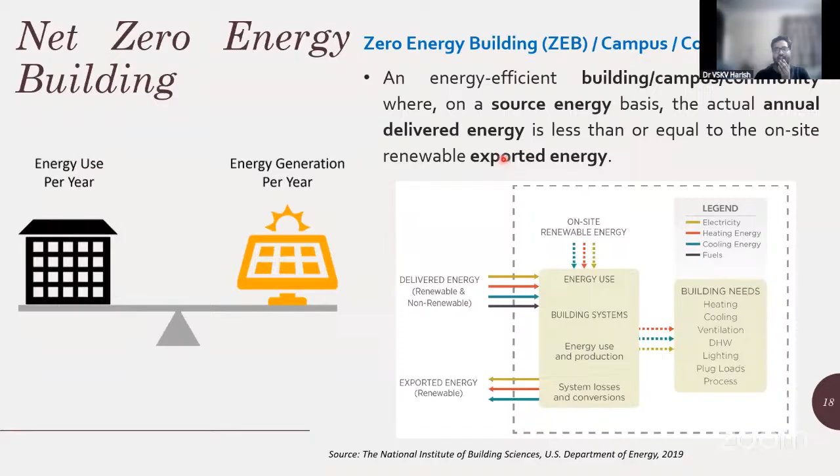If you are using diesel generator sets, small gas-based turbine power plants or whatever it is, that is not your net zero energy building. So it has to be an energy efficient building.

Green building widens it. So it's not only about energy, it is about soil, environmental impact, water, pollution, air, each and every. In layman terms, optimal usage of these things: Jal, Vayu, Prithvi, Akash. Jal, water; Vayu, air for ventilation purpose; Prithvi, the soil I talked about; Akash, sky for lighting purposes. You can see that also in our Indus Valley civilization or our old constructions. In Pondicherry, we have Auroville. In Delhi, we have Lotus Temple. All of these majorly talk about this.

Now, let us talk about smart building again. The definition that I have taken is from the Oxford Dictionary and also from the IEEE magazine, where a smart building is nothing but installation and use of advanced and integrated building technology systems, which are nothing but ICT technologies, information communication technologies.

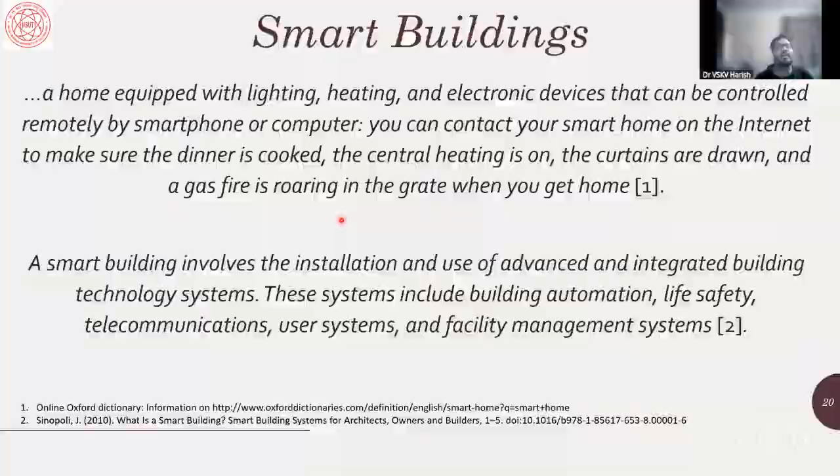So now we have understood, starting from very basic energy management, sustainable energy management, AI-based techniques, what techniques are available, the smart grid scenario, futuristic power grid scenario, modern power systems, building energy systems, net zero energy building, green building, and smart building. Now let us understand where buildings to grid integration focuses in.

Whenever we say buildings to grid integration, that means it is bi-directional flow of power and bi-directional flow of communication also. That means, as per the definition of smart grid, any appliance that you are working on, for example, I majorly work on inverter-based air conditioner systems, you may work on a smart refrigerator, someone may work on smart LED lights, all of those services or appliances can be controlled by the utility. Okay, and which is true also.

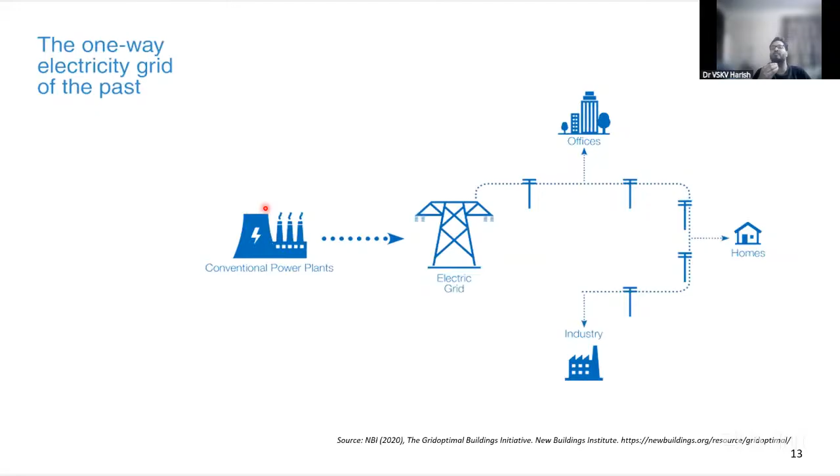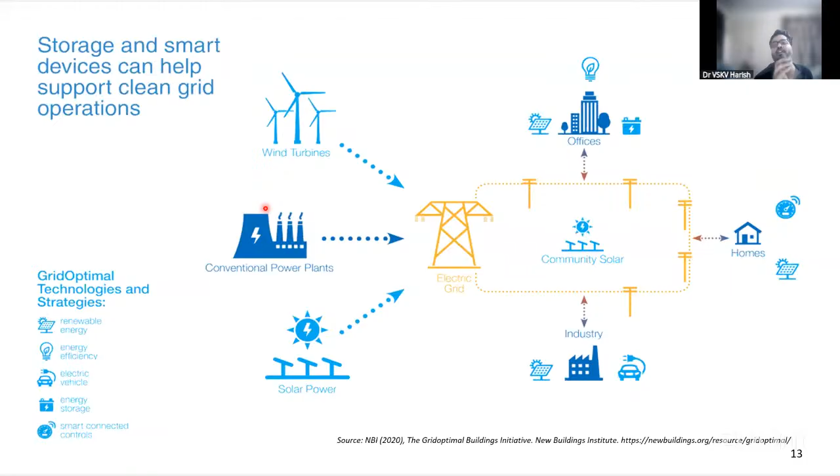I'll give you an example. I can download certain apps in my mobile through which I can switch on, switch off, and control my air conditioner system, my TV system, right? I can have an app developed and controlled by the utility, so I can integrate that feature. See how we are doing banking: we give the control to Paytm. We say, okay, I link my UPI with you and I am paying someone using mobile. In the same fashion, can you do it for control in order to regulate your frequency and voltage? That is simply the research.

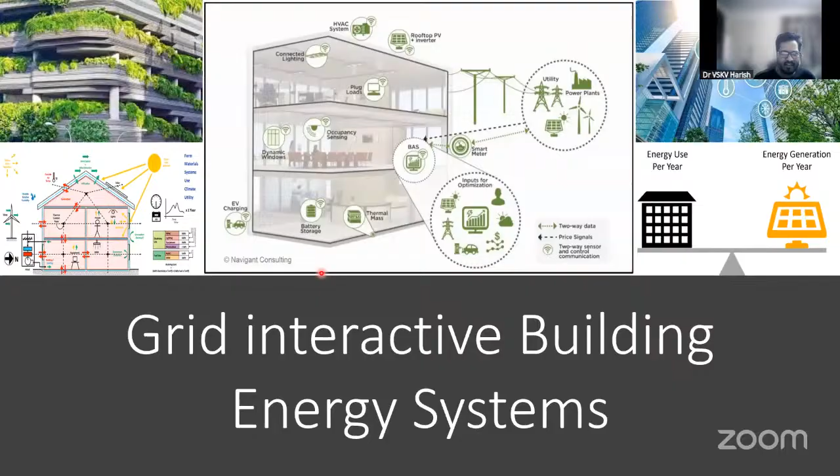This concept has already come up in a report developed by the US Department of Energy through a partnership with Navigant Consulting, where they talk about grid interactive building energy systems. This has a very technical definition: it is an energy efficient building block. This point is very, very necessary, that it is an energy efficient building with smart technologies, that is ICT based technologies, characterized by the active use of distributed energy resources, those resources which are connected at a voltage level less than 33 kV, to optimize energy usage for grid services.

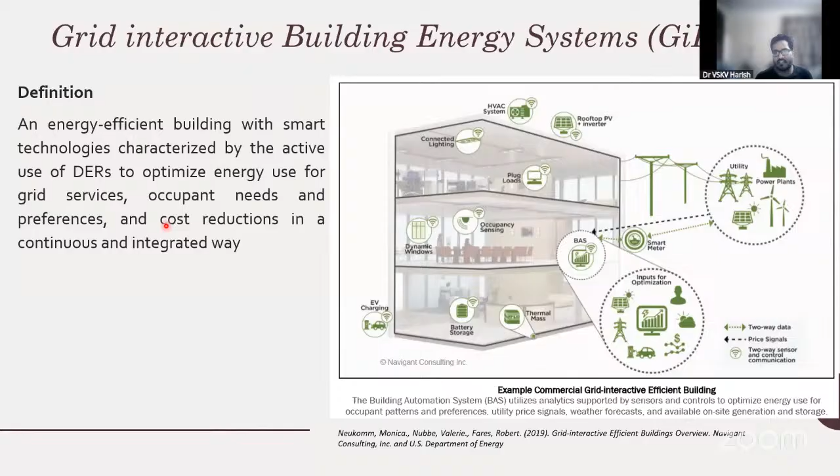Grid services means they are providing power system regulation, either frequency regulation or voltage regulation. Okay, so there is one box. One side of it is talking to the grid, another side of it is talking to us, providing us the needs: the thermal comfort, the visual comfort, the ventilation comfort, the corona-based comfort, the PM 2.5 pollution comfort. Pollution comfort means reducing that pollution. All of this happening in a cost optimal way. So cost reductions are also coming into the picture.

How do we develop it? Initially, I told you that there is no universal structure for building to grid integration because it is comparatively a novel concept. So I'm providing you the points that I consider in my study. We start with the modeling first. Three aspects. One can be white box modeling. That means you are not doing any experiments, but you are completely dependent upon mathematical equations, textbook equations, theoretical equations. Such models are very accurate, but they demand large computational power.

Then we have black box modeling. Black box means you don't know anything about the model. You just give them experimental inputs to get the experimental outputs. You do regression-based analysis to give an output-input relationship. They are very simplistic models, but heavily data-driven, and they are least accurate. Then we have gray box model, where we use theoretical equations and certain parameter values we predict using some optimization-based algorithm. I'll show you, I have an Applied Energy paper on it.

And after the modeling, we do the comfort and energy optimization because, as I told you, we are not only talking about energy management. One thing that my research is challenging is the definition of energy efficiency, net zero energy building, or smart grid. Talk about my comfort, boss. See, I'll give you an example.

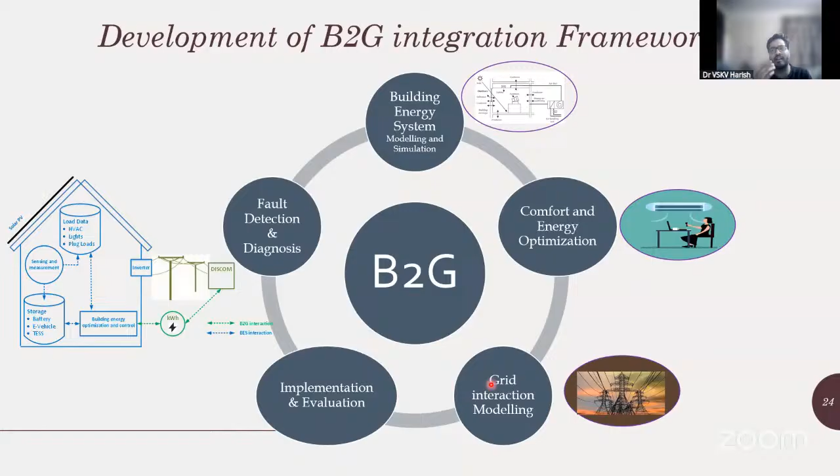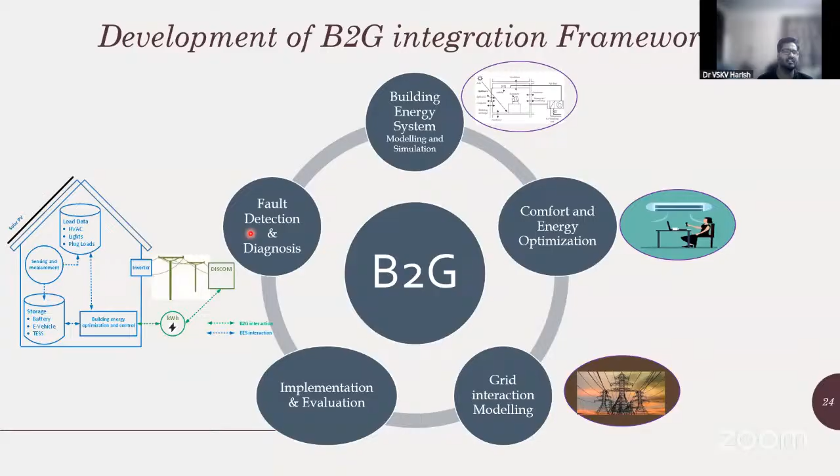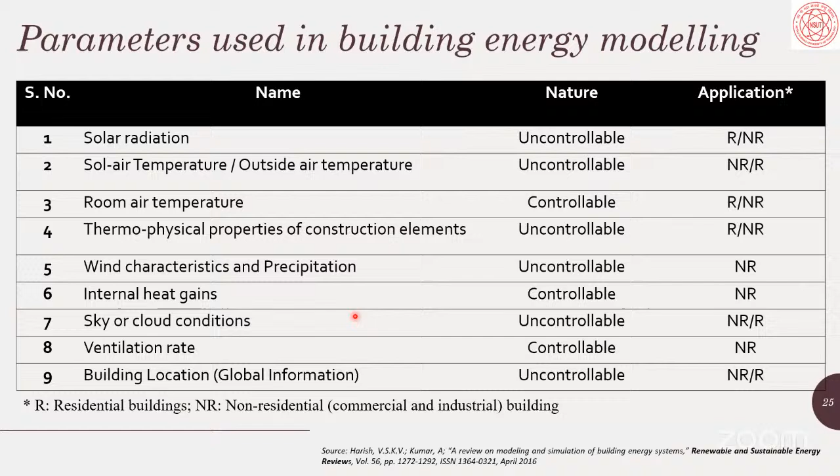That means that you can develop an algorithm for thermophysical properties. Thank you, sir. Can you tell me why, sir? Any idea? Sir, it depends on the materials which we use, like from a construction point of view. Yes, yes, yes. Very good, sir.

Thank you. Thermophysical properties of the components I have taken as uncontrollable because the control algorithm which I have developed should be universally acceptable. For example, if I develop a control algorithm which works fine for Chennai, it should work fine for Kolkata. It should work fine for a building in Mumbai as well. Thermophysical properties are majorly thermal and physical properties like thickness, thermal conductivity, resistivity of the materials which we use to build the construction. Now that data will be given to us, then only the control algorithm will work.

So the control algorithm input will be thermophysical properties. So the control algorithm will not be able to change the thermophysical properties. It will not change the input. So it will not be controllable. It is the input to the control algorithm. Hence it is uncontrollable, sir. Did you get my point, sir?

So if you see here, interestingly, solar radiation I have taken as uncontrollable, but it is controllable. Let me tell you why. Let me tell you how. If you look wherever you are sitting right now, even if you are sitting in a car and watching this, geometrically we are sitting inside a cuboid. So we have 4 walls around us. There is one roof, there is one floor. We also have doors. At the same time, we have windows.

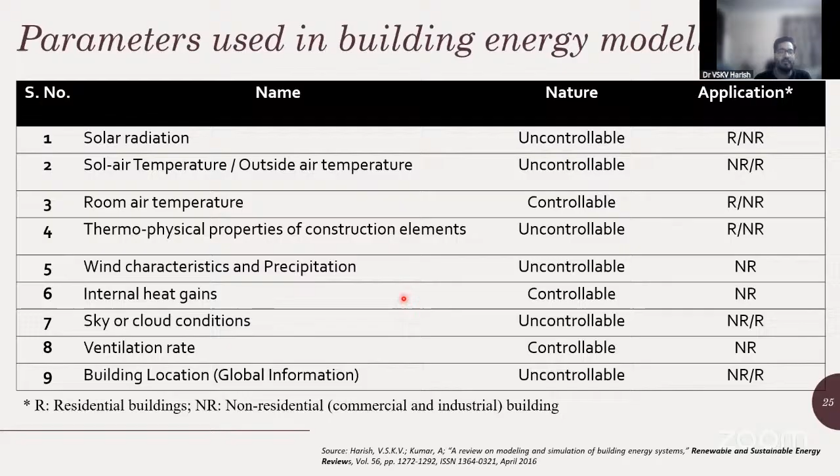So taking solar radiation as uncontrollable is a mistake, but what I'm showing you is a paper that I published in RSER in 2016. So we are now working on making this a controllable scenario, where the solar radiation will be controllable.

After developing the parameters, as sir has correctly pointed out, we make use of the thermophysical properties and develop thermal resistance and thermal capacitance. So what we are doing is developing building energy models in terms of resistance-capacitance networks. How we develop them is just like the concept of a transducer, where every physical parameter is calibrated and converted into an equivalent voltage or current signal for digitalization and for metering.

In a very similar fashion, we use the thermal-electrical analogy. As thermal energy or heat flows from a higher temperature region to a lower temperature region, in a similar fashion, electric current flows from a higher potential point to a lower potential point. So in any network, the voltage nodes become the temperature nodes and the current flow becomes the heat flow, right? That is why we make use of the thermal-electrical analogy.

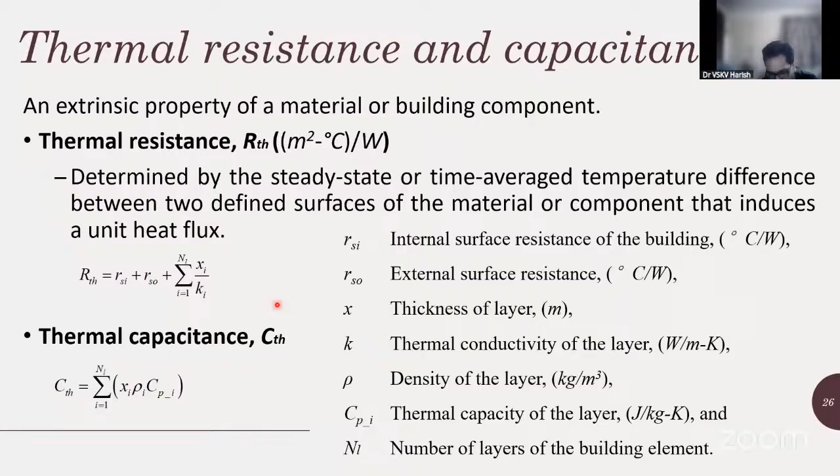One more thing where machine learning and AI based aspects are coming in is occupants comfort centric approach, or occupants comfort centric control. Can we, in a nutshell, integrate or operate an air conditioner without a remote control? That is this research aspect.

I'll give you an example. My cabin in NSUT has an air conditioner system. We are in regular service there for several years, so there will be a certain pattern of how I use my air conditioner system, switching it on or off, changing from 24 to 26, sometimes 16, using the remote control.

I told you that a mobile can also control the air conditioner system. Mobile has Bluetooth, using which it does that. If I can tap my behavioral pattern using some computer-based algorithm and make use of my mobile, since we have our mobile with us at all times, even sadly during washrooms.

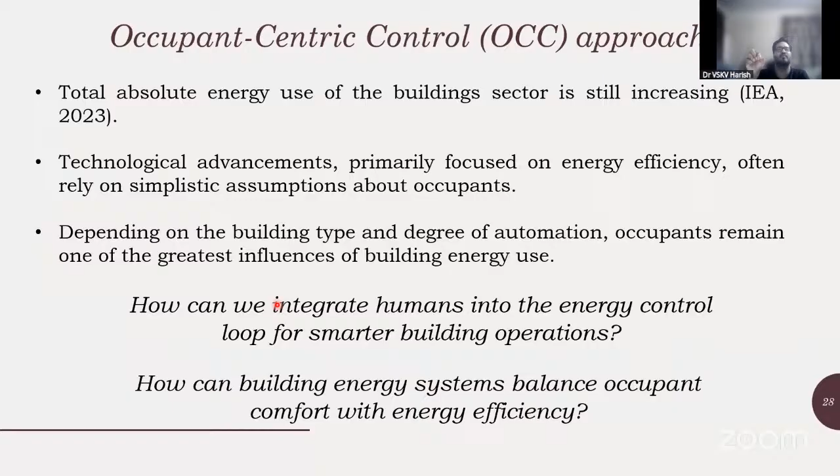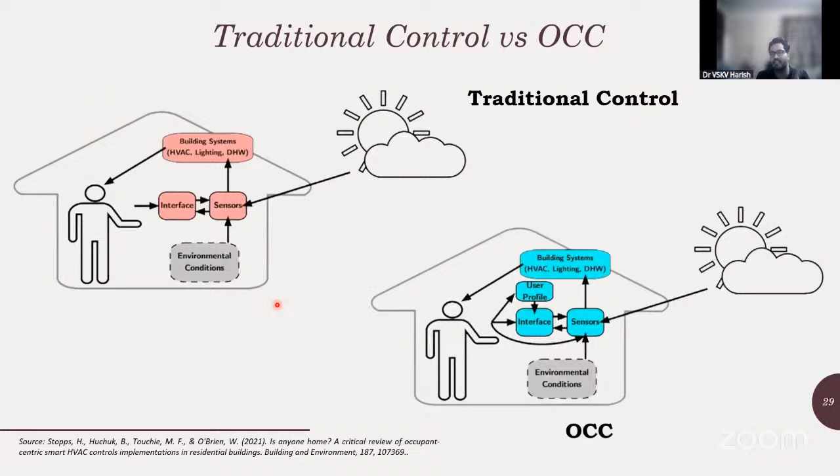That is occupants comfort centric control based building-to-grid integration, how we can integrate humans through technologies for comfort based control. That is OCC, occupants comfort centric control, which is again an AI based sustainable building energy management system, where we not only focus on occupants and building but also on IEQ, indoor environmental quality.

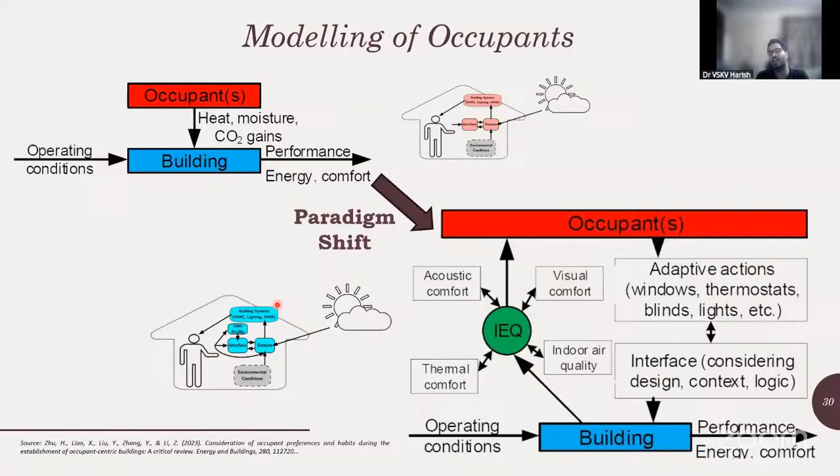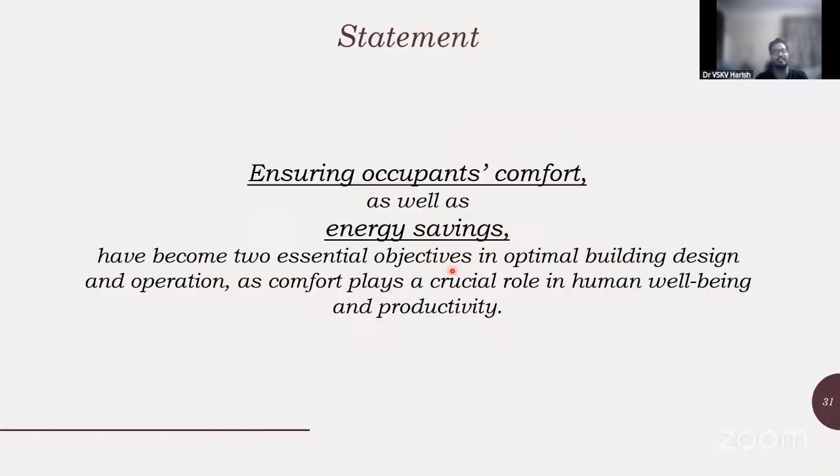IEQ is indoor environmental quality. So the problem statement through which we are doing OCC research is ensuring occupants' comfort as well as energy saving. These two become the main objectives for optimal building energy usage.

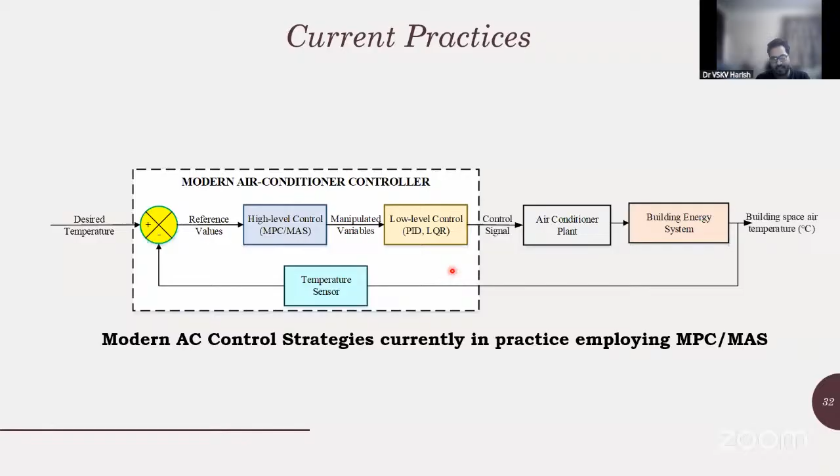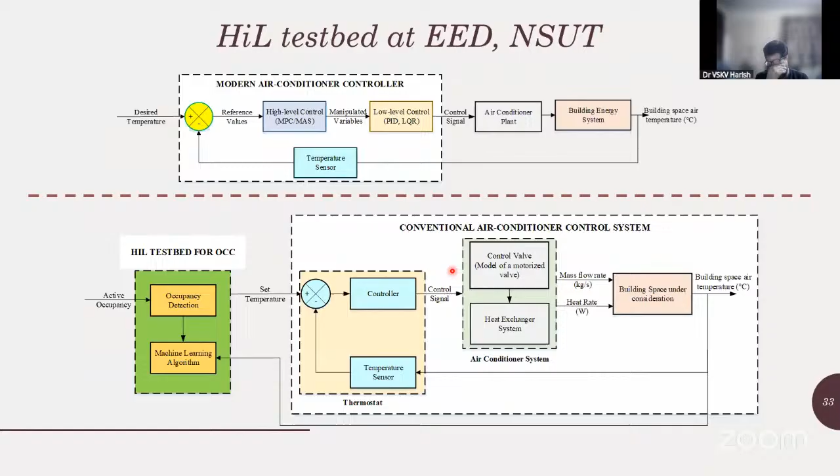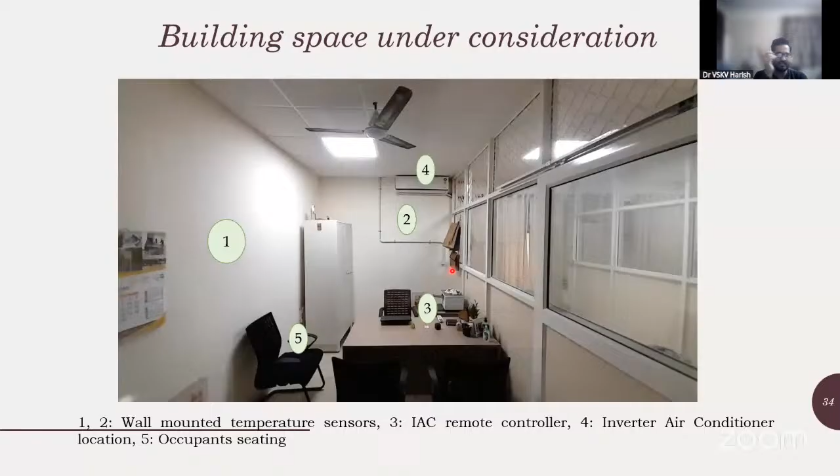This is my baseline scenario that I have taken into consideration, and this is the hardware-in-loop test bed we are developing in my cabin at NSUT, where we will install wall mounted sensors and everything, and the split air conditioner system will operate according to my mobile, which will get control commands from the Opal RT, the microcontroller we will design for frequency regulation.

This is the working flow chart we have developed. If anybody is interested, I encourage you to have a discussion and we can work on this.

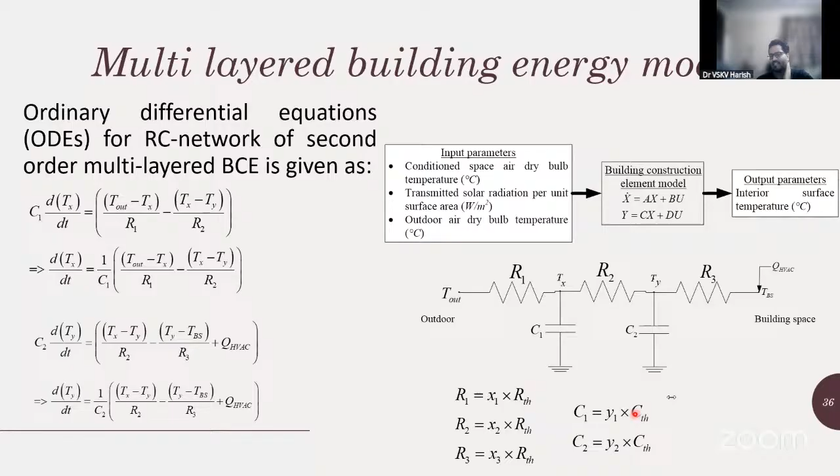Coming back to the building energy modeling, which I told you will have the RC networks, the main gap is what should be the value of R1, R2, R3, C1, C2. Large number of research studies have bifurcated equally to the thermal resistance. Again, I showed you a slide where RTH and CTH calculations were done based on thermophysical properties, but that is not always true.

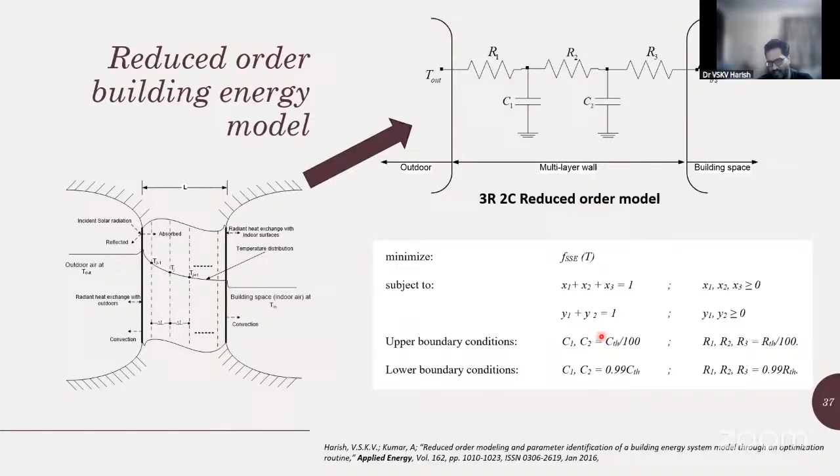So what I have done is develop a reduced order modeling and parameter estimation identification technique, where we make use of FMINCON, a constrained optimization algorithm, to develop the R and C values of the thermal resistance and capacitance network. As I told you, since we are sitting inside a cuboid, every wall will have a 3 resistance-capacitance network, because it's a second order model.

And the window will have a 2 resistance 1 capacitance network, because the temperature or outdoor weather can easily pass through the glass as compared to the wall.

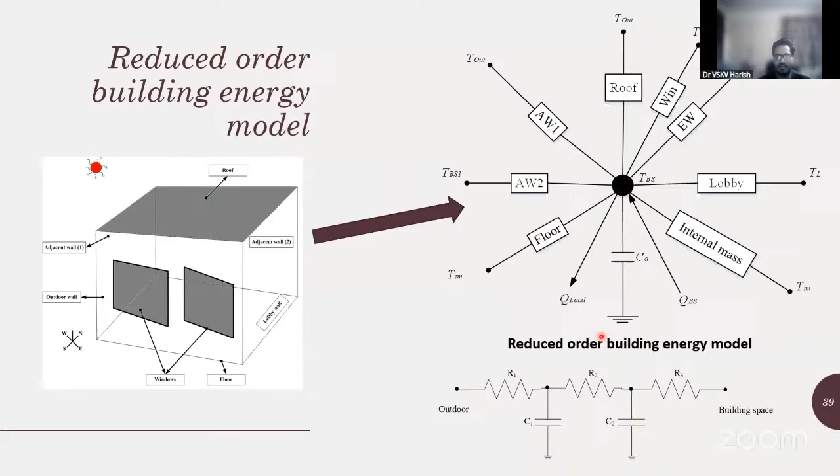Again, we develop a model order reduction technique. That's why it was named reduced order model. So I developed a building energy model.

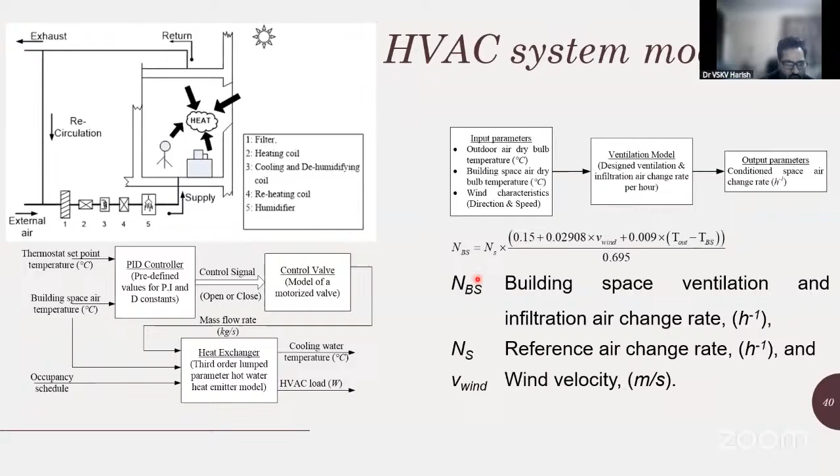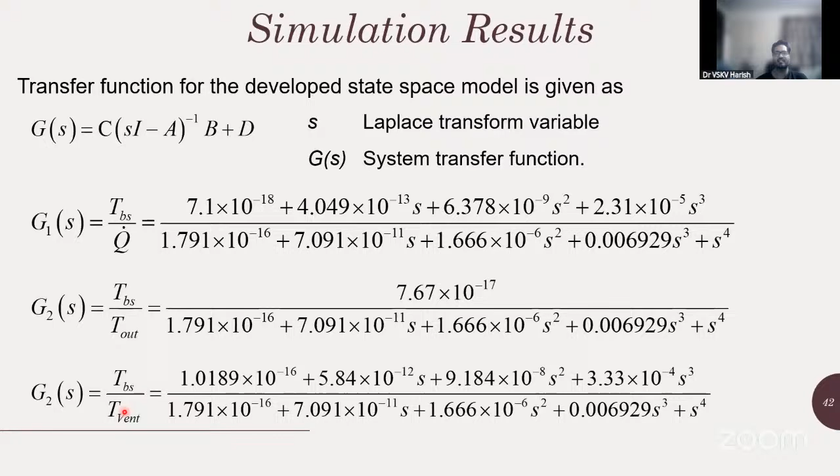It is a MIMO system, so it will not have only one transfer function. It will have 3 transfer functions for perturbations in output coming from the air conditioner systems, perturbations in the outdoor temperature, and perturbations in the ventilation. This is considering any leakage if it is happening in the system.

If you want to see the outputs, I encourage you to go through the reference papers or research paper.

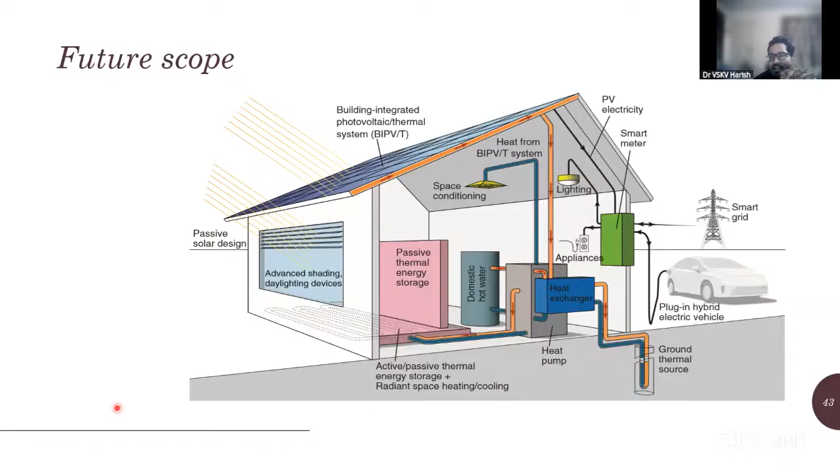Majorly in the coming decade, my major focus is on developing a net zero smart energy tool, which will consider the engineering, social, socio-techno-economic aspects for prosumer-based systems, where we are considering not only the energy technologies, but also the environmental aspects. The environmental aspects I am lacking.

I'll be starting with the research scholar, who will be coming to us in the December January admissions.

So thus, it is very much important that we understand and develop sustainable energy management and smart grids using AI, where we are able to integrate the renewable energy generation in order to make the grid stable. We make use of virtual inertia. We also enhance the demand side intelligence, using smart technologies.

We ensure social equity through peer-to-peer energy trading. Actually, this is majorly on peer-to-peer energy trading, where all the stakeholders of any economic class get benefits from P2P energy sharing, and thus we develop smart grid.

See, smart grid is not like a smartphone. You cannot go to the market and change your phone. You cannot go to the market and change your grid. We have to convert or transition our existing grid into a much better, smarter grid or smarter scenario.

I hope I was able to generate interest in buildings to grid integration with some AI-based techniques. I didn't go much deeper into what are AI-based techniques, because I was told that this is not a workshop.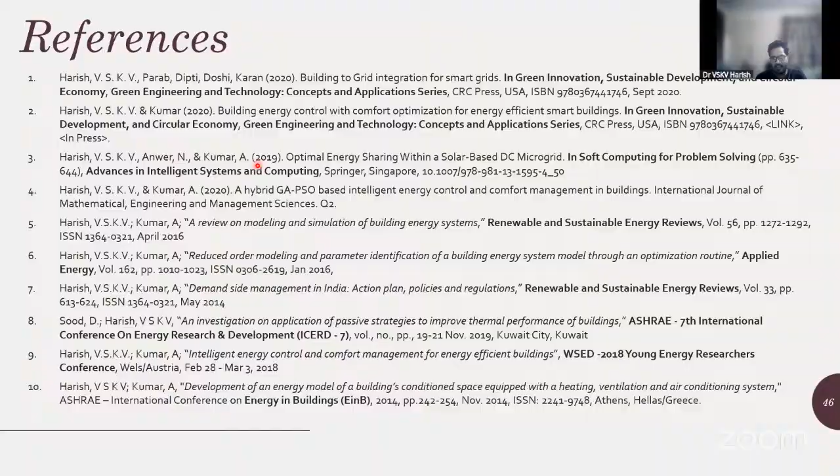Majorly, I'll show you how we can implement one paper so that you get a good starting point, a takeoff for all of you. So I hope I was able to generate your interest in building to grid integration. Thank you all for the patient listening.